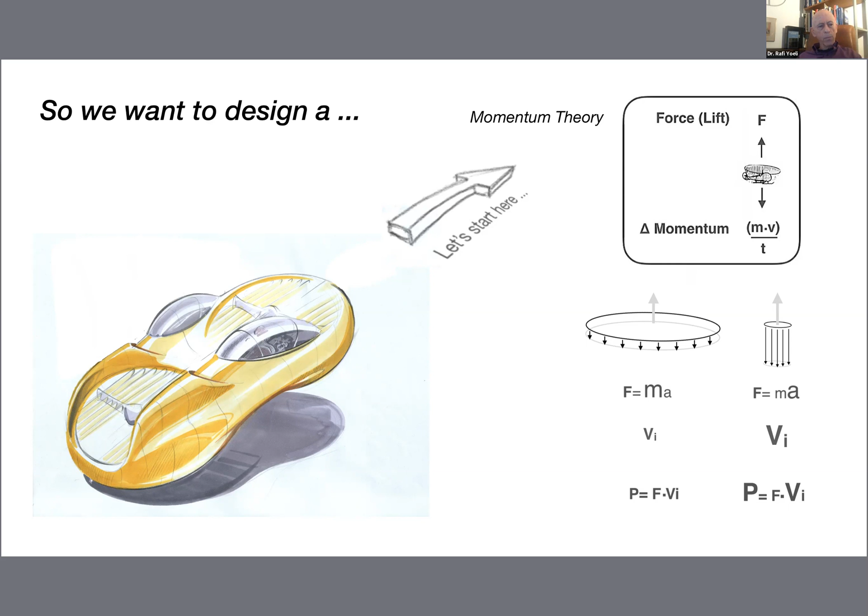Some algebraic manipulation of the numbers ends up with two very common terms: disk loading, which is the weight of your aircraft divided by the area of your rotors, and power loading, which is how many pounds you can lift per horsepower. These are commonly drawn in the aeronautical literature on a log-log scale, and this is nothing more than the power equation - that's the lift times the induced velocity. You can derive it in a few lines, very simple, and you can see a straight line. So the higher the disk loading, the lower the power loading, as you can see.

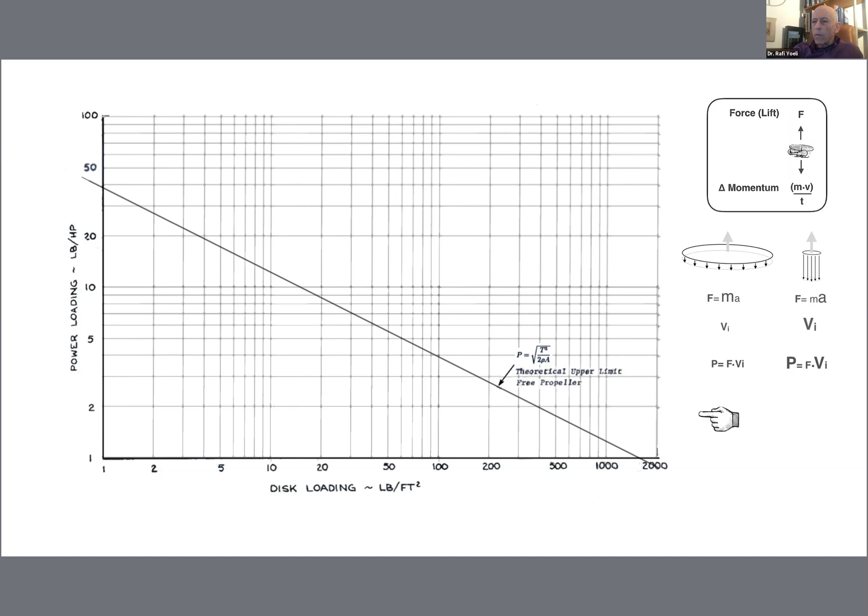Now, it's interesting to see how actual VTOLs fare compared to the theoretical line, and you can see many of them drawn here. This is a statistical chart, and of course you can take every aircraft's weight and the disk area. By the way, you have to take the net disk area - so one propeller above the other don't count. You need to count them like in top view to see their projected area. You know the power of the engine and so forth.

The area for a Harrier would be the 4 nozzles that it uses, and the area for the hummingbird that you see on the left would be the swept area when its wings move, which is the same as for any other vehicle. So we see very, very small disk loading for the hummingbird. Then next to it are the eVTOLs and the quadcopters and so on. You see a bunch of helicopters, many, many helicopters, around the 10 pounds per square foot. Then you move to the right, and there are the V-22 and all the air jeeps. Notice that the power loading has gone down from 10 to 5 pounds per horsepower.

So you really pay in terms of what you can carry. And you go further down, and down below, you see the F-35 in the most right-hand side corner. And this aircraft is really highly loaded. I'm talking about the fan behind the pilot's fuselage.

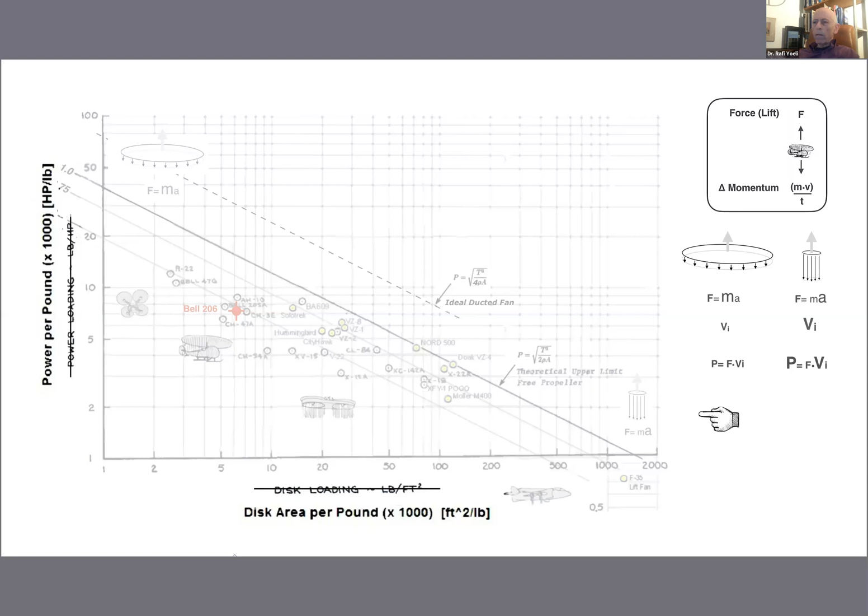So we'll see it in a minute, but before we do, I want to make another small change. I don't like the log-log scale. So if you'll allow me, I will just use a linear scale, and let's see what we get. So here's the same data exactly, drawn against the inverse of disk loading, inverse of power loading on a linear scale.

Now this, when I first saw this, some of you may have seen this before or may have played with this before, but I saw it for the first time when I did that. And this was a huge surprise for me. Because now the chart is really talking to me and telling me things that I didn't see before. And suddenly momentum theory is a synthesis tool. So let me show you why it's a synthesis tool.

Here's your Bell 206. And look at all the other helicopters. The other helicopters are very, very similar in their power per pound. And they vary very much in their disk area. So there's a large variety of disk area per pound, but not a big change in the power for the helicopters. So this is something to think about.

But we don't want another helicopter, do we? What do we want? We want a car-sized air taxi. Where would the region for a car-sized air taxi be? We'd like to have very compact dimensions, internal rotors, but we wouldn't want to risk too much power. So isn't this the corner where you would probably aim for if you were to design a modern air jeep or a flying car?

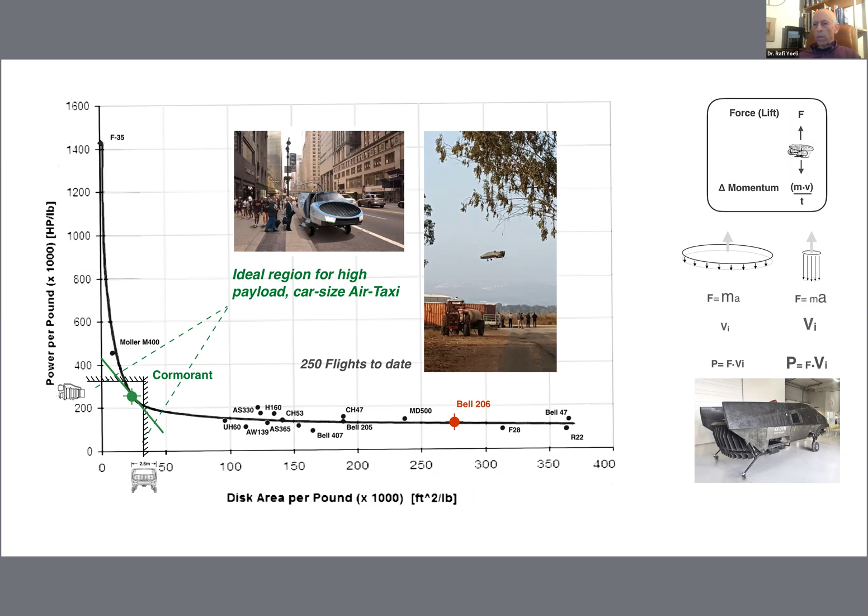And look at what we've achieved with actually no extra analysis or work, just by looking at the graph. Just to illustrate my point, would anyone have guessed that this is the optimal location in terms of disk loading and power loading for a future flying car?

CityHawk, by the way, is a similar chassis, similar size to Cormorant. It's a little heavier because it's twin engine, but again, basically in the same area of the graph, and has a high power, but available, not too expensive engines, and it has the same performance as the Bell 206 helicopter. So in that sense, I think we've achieved our goal that we set at the beginning of the journey, all just by using momentum theory, but using it wisely.

I'd like to say a few words now about an issue that is very different from what I spoke about until now, that bothers me a bit, and I want to share it with you. And that is our sometimes not so objective relationship with the past and past projects.

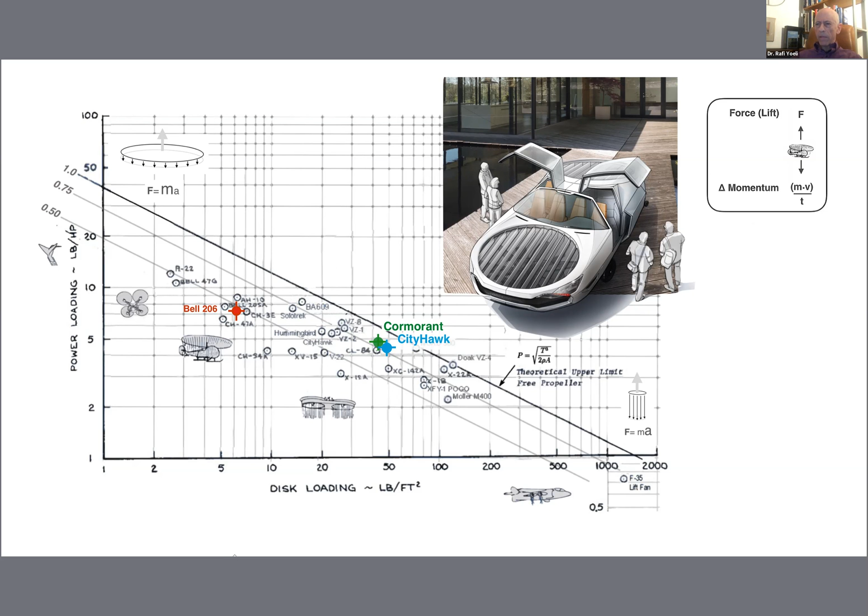Look at this chart for a minute, and I'm sure almost everyone who's watching this now knows this Wheel of Misfortune, as it's called. Excellent infographic done by Michael Hirschberg, I think, which shows all the experiments that were done in the 60s and 70s, divided into categories. Beautiful chart. You can spend hours with this chart and see what was done and so on. Only a few emerged.

All of these aircraft were stopped, except the V-22, the tilt rotor, which started with the XV-15. Now the V-22 is in service. There were tilt rotors then. The F-35 also came out. I mean, there was already some fan in fuselage tested back then. The Harrier, of course. And maybe the VZ-8 has been resurrected due to our almost 20 years of work. We don't know yet.

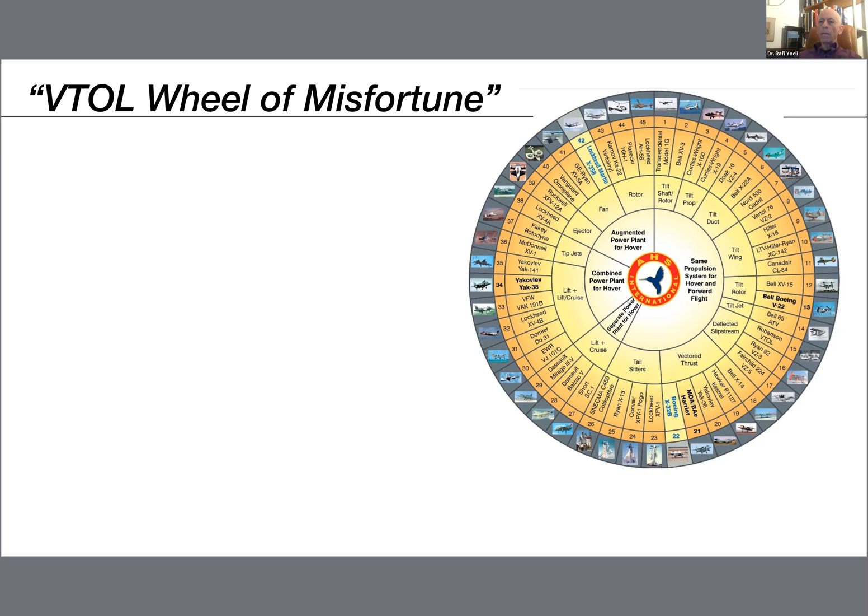Now, because so many concepts didn't make it to production, this chart is universally known as the Wheel of Misfortune. But that's where many people get confused. And I've heard many people say that because these projects were canceled, we need to look for new ideas.

Is this true? Well, maybe not. But I can tell you that there were very smart people behind these programs. And I must tell you that most of these aircraft were outstanding aircraft. They were very successful aircraft built by hugely talented people.

And why aren't they in service? You know, there's so many reasons. A general moved on to another position, and the general who took his place didn't want to continue. A conflict like the Vietnam War, for which something was conceived, may have ended. Money may have ended. The inventor may have died prematurely.

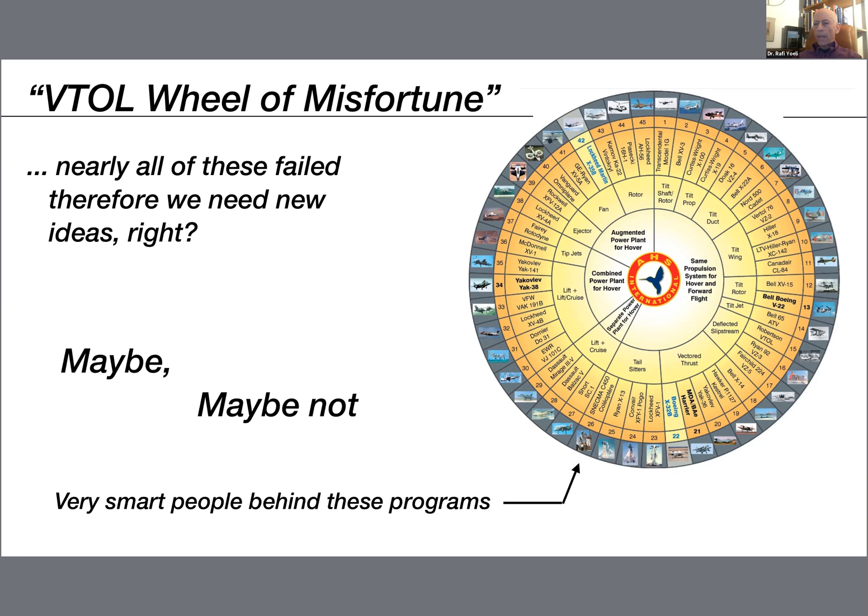Or, you know, sometimes these programs are just budgeted as an experimental program. And they're very successful, but there's no follow-up. So again, the fact that they're not in service today doesn't mean that they were bad aircraft.

And I'm saying this because if you want to design a new VTOL aircraft, do yourself a favor and go and read and learn and look at the NACA reports and look at the flight reports and learn about each and every one of these aircraft, because these are, number one, fascinating stories. Number two, the people who designed them didn't have the technology that we have today. They had a much more difficult task, and I raise my hat for them.

Speaking about hats, we see sometimes, you know, even 20s and 30s era movies, black and white, with people moving a little fast. They look like a slapstick movie, and they wear top hats. And in the background, there's a helicopter. But we think it's funny. We don't take them seriously.

But these people are brilliant people. They paved the way for us. And don't be misled by how they looked, by the black and white movies, by the bad videos, and so on. Some of these were great aircraft.

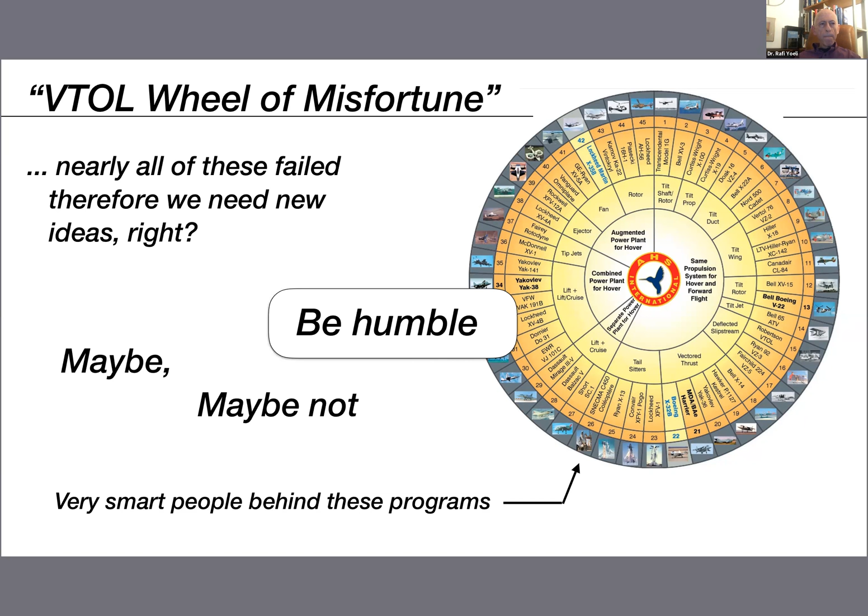So with this point behind us, I want to move on to something else that maybe is connected to this, but a little different. Is anyone here involved in VTOL urban air mobility? If you are, you might want to look back and see that millions of passengers were flown in a decade of helicopter flight. New York Airways, Massachusetts Helicopter Airlines, Los Angeles Airways.

What happened? Where are all these helicopters? Why was this service stopped? I will leave it to you to find out, but it would be worthwhile to do that. And what happened to this idea? Do you know that all these aircraft flew very well. And you know, they were even FAA certified and they were commercially available. You could buy them.

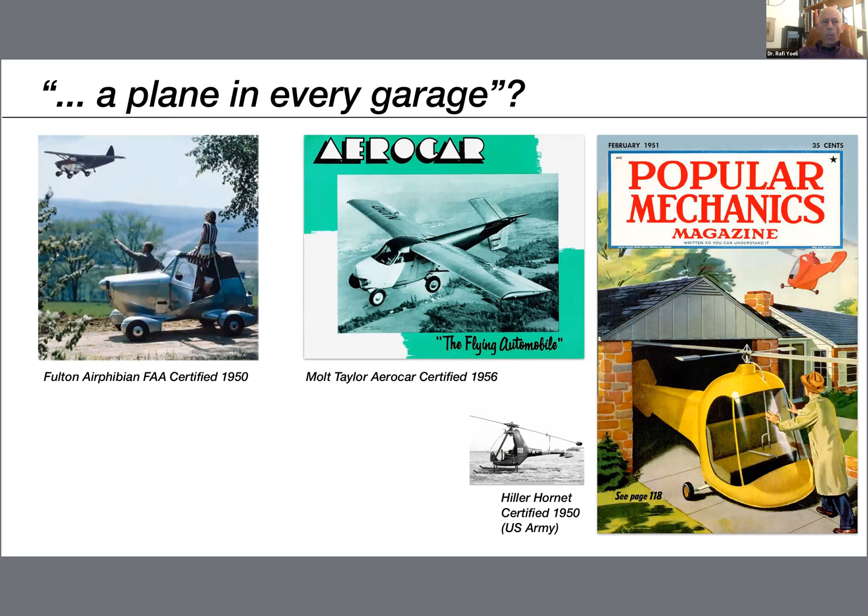So where are they? Why aren't they around anymore? Read about it. I leave it to you to find out. The question is, will we succeed this time around? We might, but not if we fail to learn the lessons from the past. And it's very important to go and see and find ways to overcome them and learn from other people's experience.

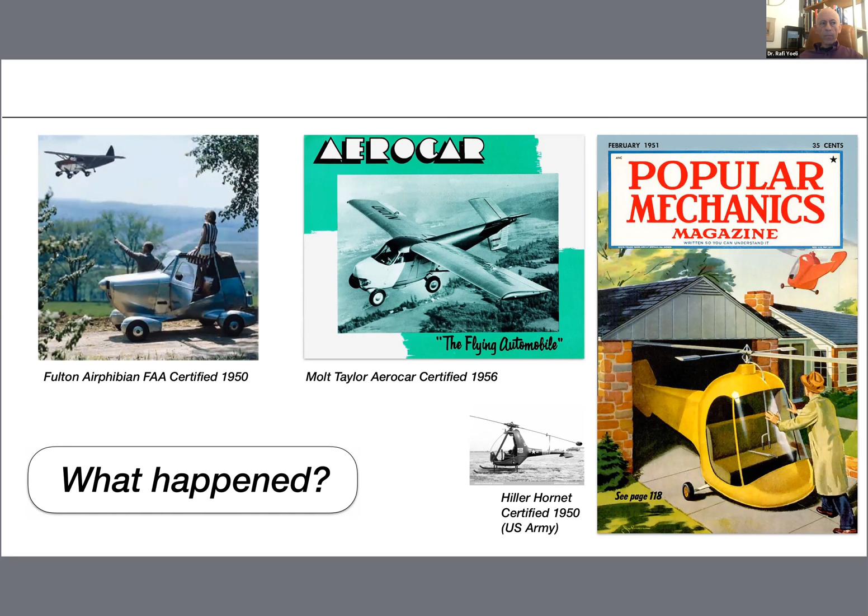I want to move to almost today's time for us and to say a few words about full-scale prototypes and demo aircraft. So I think everyone knows and realizes that few things can elevate you more than a full-scale prototype of your creation, of your idea, that shows what you want to do, what you're proposing in full scale. And I want to share with you a few bits of wisdom from my own experience of a few decades of constructing and testing and building a number of prototypes and demo aircraft.

And to everything that I say, by the way, in this talk, and also especially what I'm going to say now, you have to apply your own judgment. You have to decide, do you want to go in the same way, and do you want to make the same decisions, and do you want to have the same kind of risk management that I've employed over the years? So it's your choice. I just want to tell you a little about my journey and what I learned from it.

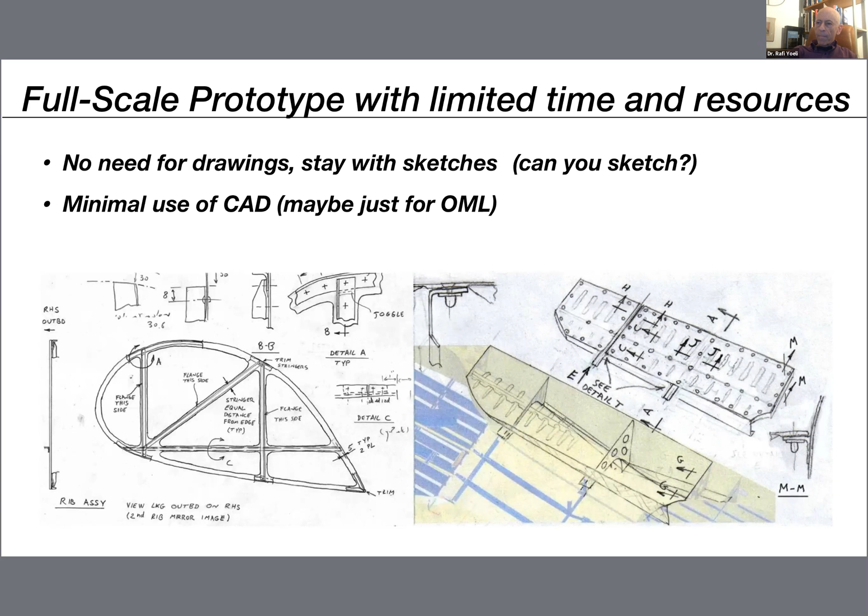Here are some more things to remember. In all the programs I've done so far, I've made a point of taking an engine or a motor, if it's an electric motor, with 25-30% more power than my most severe analysis. Now, taking a more powerful engine almost doesn't influence your design. It sometimes doesn't even add too much weight, and it's worth it, because if you end up with too much weight or too little performance and so on, this overpower can compensate for it, and you can still show your demo when the time comes.

This also enables you to tolerate extra weight. It shouldn't be overdone, but for now, leave yourself some freedom not to save the last ounce of weight on the structures, landing gear, rotors, transmissions. Give them some margins, give yourself a margin, and you'll be able to do it in half the time and a little bit heavier.

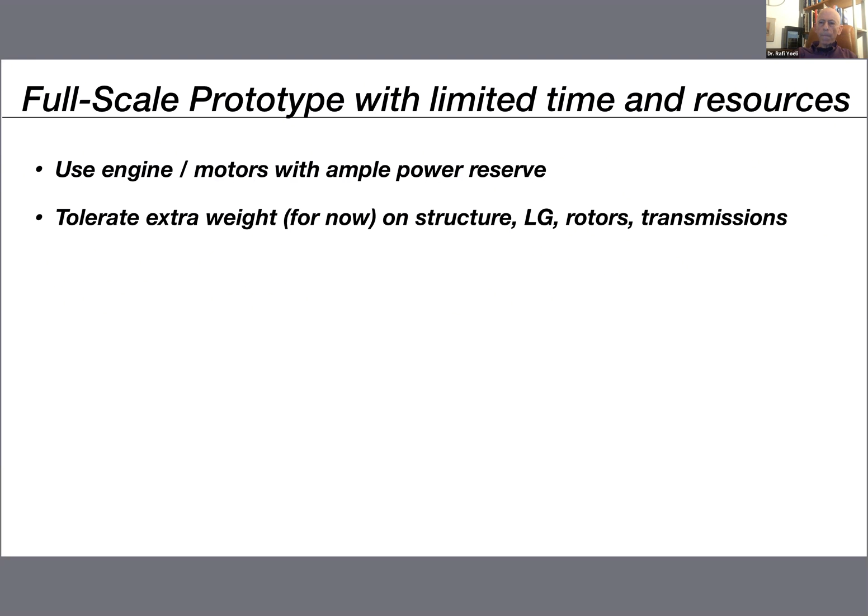Now, two rather more severe recommendations, and you really need to be a little more experienced to take these on yourselves. The first is to eliminate subcomponent tests. What I mean, for example, if you're building a new VTOL aircraft that has an engine and power transmission, which is shafts and couplings and gearboxes and so on. It's very common and makes a lot of sense to first run these gearboxes on a stand, and run the rotors on a stand if these are new rotors. Run the whole thing on a stand, but run them individually first and make sure they work together. We usually don't do that. We usually assemble them, put them together, and run them together for the first time.

We found that this saves a lot of time. If something goes wrong, if there's a little vibration or something doesn't fit, it'll tell you, and then you can just fix that, and you're done with the rest. So a lot of time and money is really saved by putting the whole machine together and firing up the engine, and not flying it first, of course, tying it to the ground and seeing what happens. So this is another recommendation.

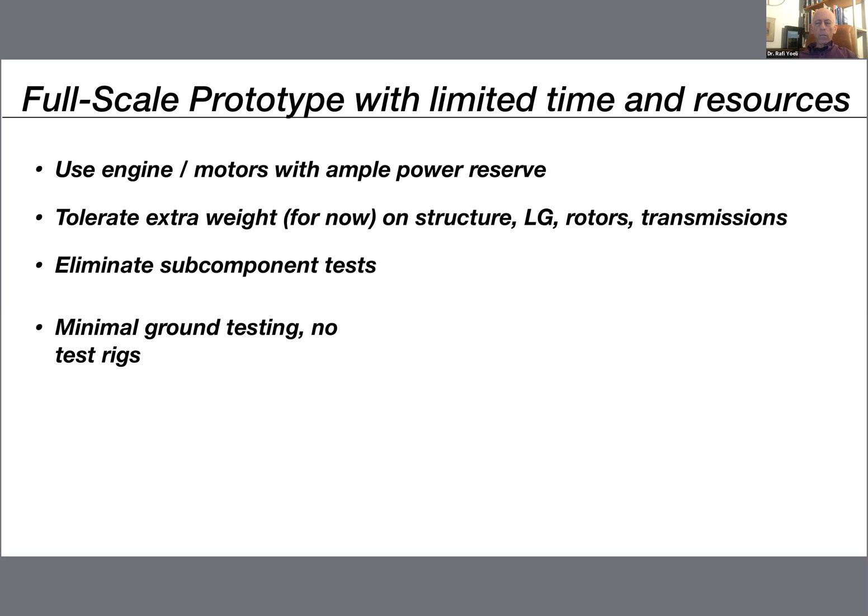This is our initial flight of the Cormorant. It had skids in the beginning, it now has wheels. So what did we do? We tied it to the ground. The rotors were there, the transmissions were there, the engine was there, the fly-by-wire was there, and we fired up the engine, and this is the first time this whole thing started turning around.

So we did the first run, we tied it to the ground, and then we had to do an endurance test, right? You can't just go ahead and fly around the patch with a gearbox that has 7 minutes of ground testing. This is totally irresponsible. So the next step is usually getting back to the stand, running the gearboxes for 50 hours or 20 hours or as much as you like. But we were eager to get up.

We wanted to get up in there, and the flight control engineers were very frustrated that the whole aircraft runs, everything turns, there's wind, there's everything, and the aircraft is tied to the ground. So they asked us, could you please get this aircraft just 2 feet up so that we can get some air on our control vanes and see how our flight control system works. So we did that, and the complete endurance run on this aircraft was done with the aircraft hovering low above the tarmac. Again, some risk, but a lot of time saved and a lot of lessons learned.

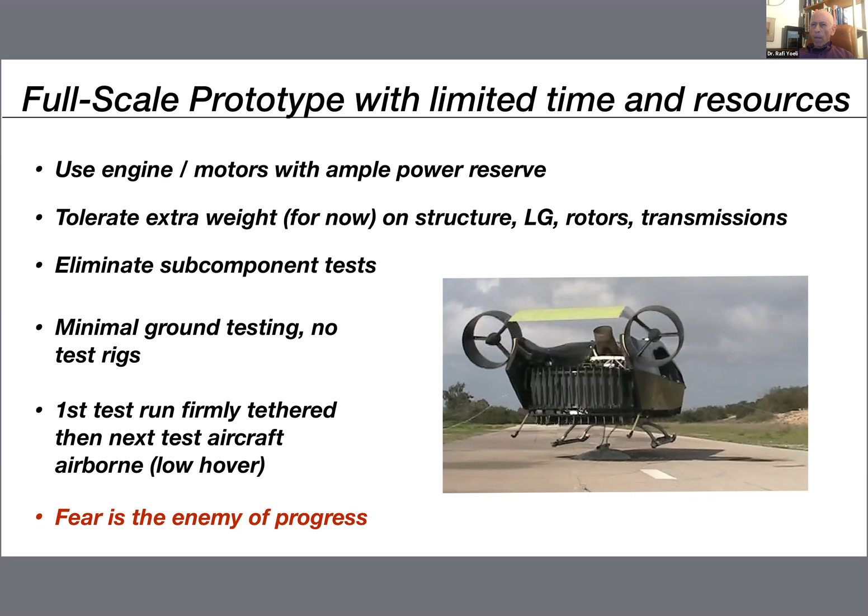Now be vigilant, be careful, don't rush, but don't be afraid to leave some stones unturned. It doesn't come in a day. There's no recipe that can tell you how to get to the point where you can take risks, trust your intuition, and really break the mold. Choose the difficult path, choose the less traveled path, and never stop learning. This is what I've found.

I'll tell you a story. When I was a young student, I had a professor, Professor Shatsky, who recommended that when we graduate from aeronautical engineering school, we don't go to work as an engineer, but spend a year in the workshop, just like a workshop apprentice. We didn't take his advice, of course - we all wanted to start our careers. Looking back, this was the right decision. I mean, nobody in their right mind would really not go and be an engineer after getting their diploma. But I can tell you that all of us in that class who worked for a few years as an engineer, but then took a break for a year or two and did something else, came back much better engineers than those who had stayed for many years from the day they graduated onwards.

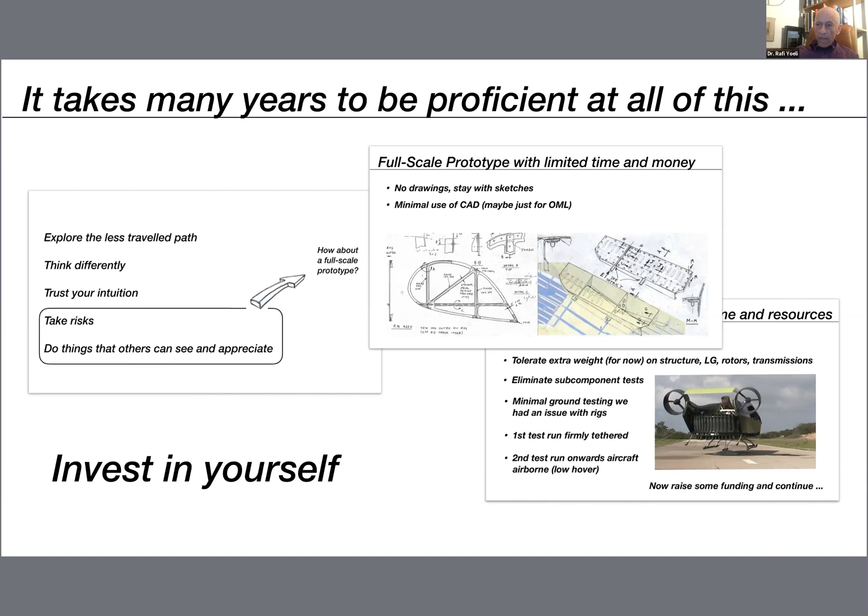So my recommendation to you is to invest in yourself and take a break. This is a very unusual recommendation when we're talking about designing a VTOL aircraft, but I'm totally serious, and I'm talking about a perspective of a few years. Go fly as a bush pilot in Alaska for 5 years, or get a job at one of the overseas aerospace companies for a year or two. It'll broaden your mind, and you'll come back a much, much better engineer than you are already.

Oshkosh, Wisconsin. Go there, spend time at the workshops. This is the Experimental Aircraft Association. Very, very worthwhile. You'll learn a lot, you'll be inspired, you'll see how aircraft are designed. It has given me a lot.

Practice sketching. I already talked about that. I can tell you that I remember each time a senior engineer took out a thick pencil from his or her shirt pocket and sketched an idea on a blank piece of paper, everyone around this person was silent. Everyone was listening. Practice sketching, it'll pay off.

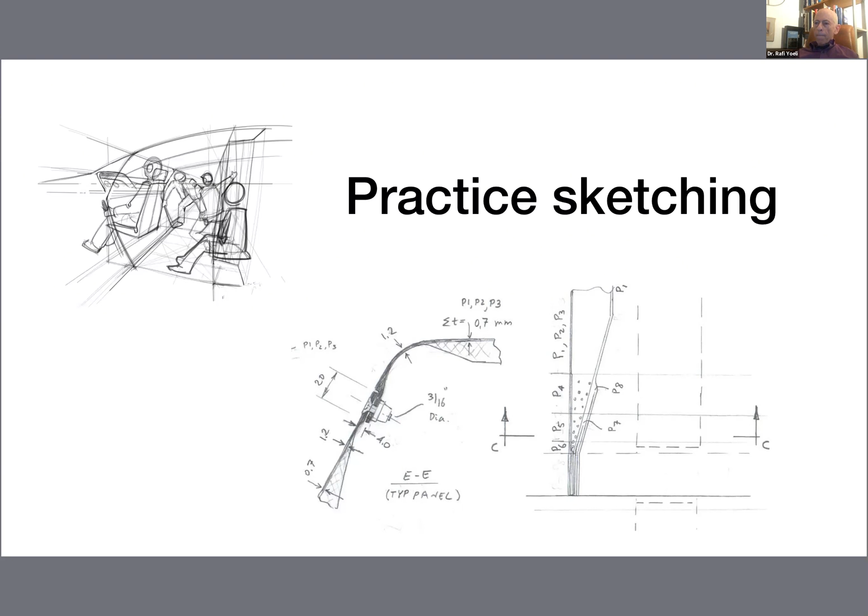This will pay off tremendously. Learn to fly. If you're an aeronautical engineer, if you're a fixed-wing engineer, go fly fixed-wing aircraft. If you're a helicopter or VTOL designer, go and fly a helicopter. And don't just take a check ride. Go and get your private pilot license. Go and learn how these aircraft look from the inside and how they look from the perspective of the people who use them. Thank you very much.

Gwen: Thank you so much, Rafi. A lot of critical and important information in your lecture here. We have a couple of questions for you coming in. The first being, what would you have done differently at the very beginning of getting your company going from a non-technical perspective?

I don't know. I don't think, looking back, I don't regret anything, and I don't think I would have done it differently. Now, I can maybe understand where this question is coming from, because it's very scary to raise money on the move, to do something and then advance a little bit and then raise a little more money and so on. It's a really unusual way to work. This is how I've worked in the past. It has been scary at times, but you can sit and raise money the whole round, and then start working. But I never had the patience to just sit and wait for the full funding. There was some funding, there was a good business plan. It's always a business plan. So I'm sorry, I don't regret anything. I think this is the right way to go. If you're a small company, especially if you're almost an individual or just working with 2-3 guys together, this is the way to go, in my opinion.

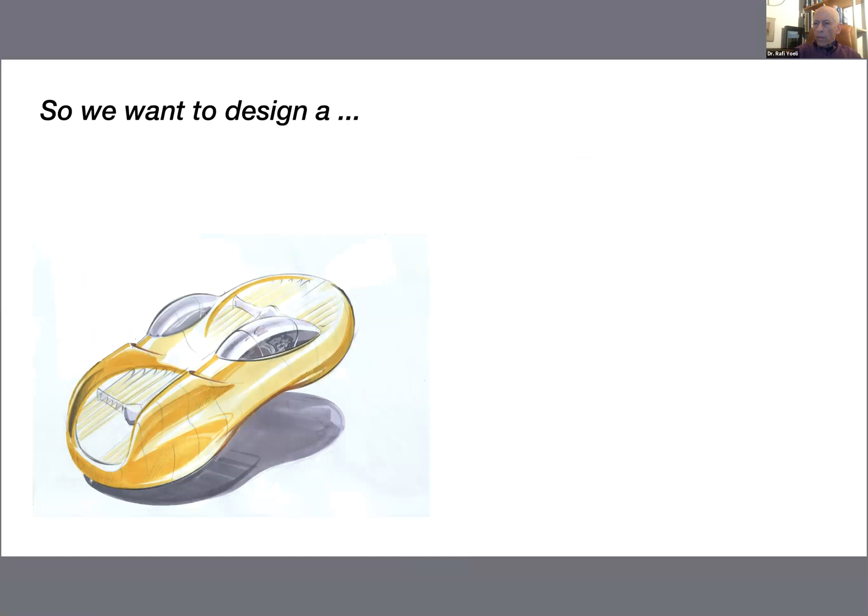If this aircraft needs, and I don't remember all the details of the GoFly competition, but if this aircraft needs to hover only to take off vertically and land vertically, and then spend most of its time flying, then it could use a wing to support it, and then it wouldn't need such a low disk loading.

So you could have a higher disk loading, use very high power for the jump takeoff and then for the landing, as many vehicles out there are doing. But this, of course, increases the footprint of the aircraft.